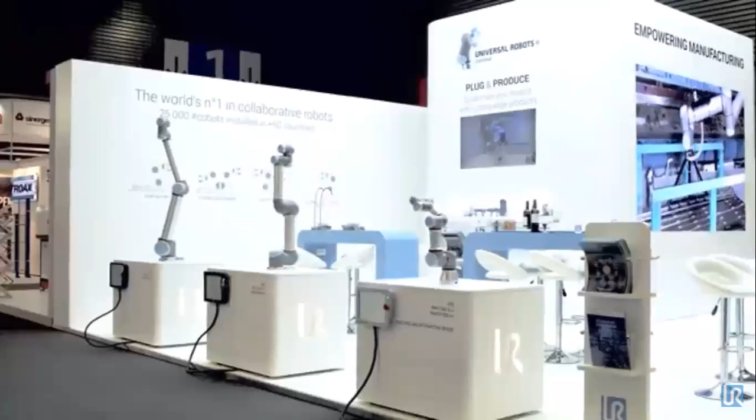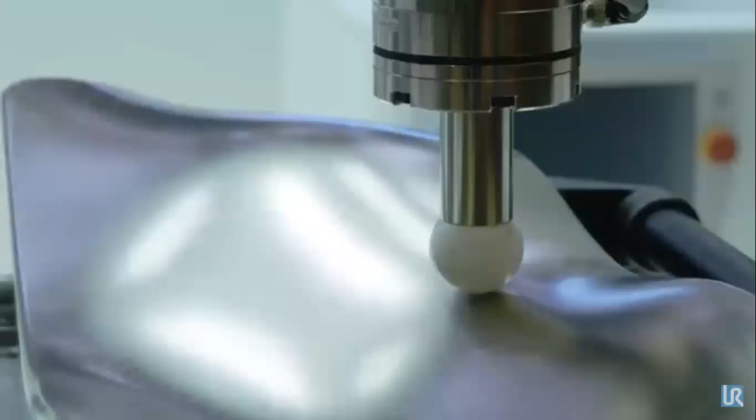In the development of robotics, there is a wide variety of interests and technologies that different companies are developing, although it is difficult to classify robots with our sequences of discoveries on which one can rely. However, one can clarify the line in which robots have a specific purpose and in this way see the progress they can carry out.

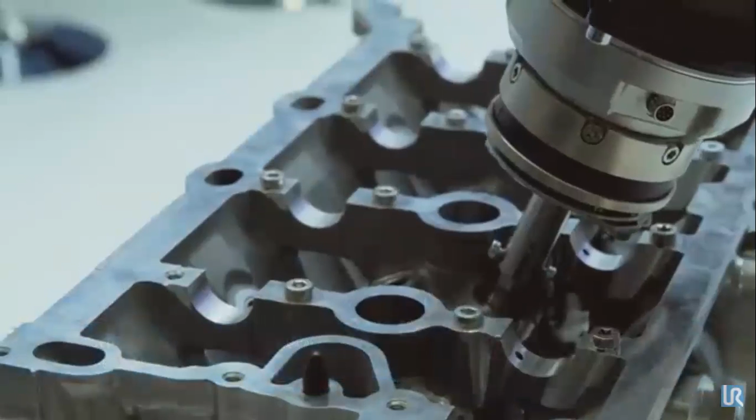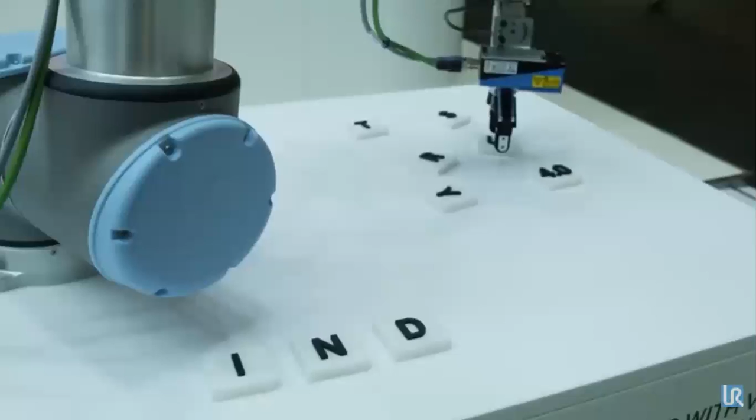In addition, one must always bear in mind that new and optimized technologies adapted to this environment emerge every day. Mobile robots are usually designed to move through environments where there are different obstacles since they are always in motion. Therefore, the environment of the robots changes in this way. They must constantly recognize the environment where they move in order to adapt adequately.

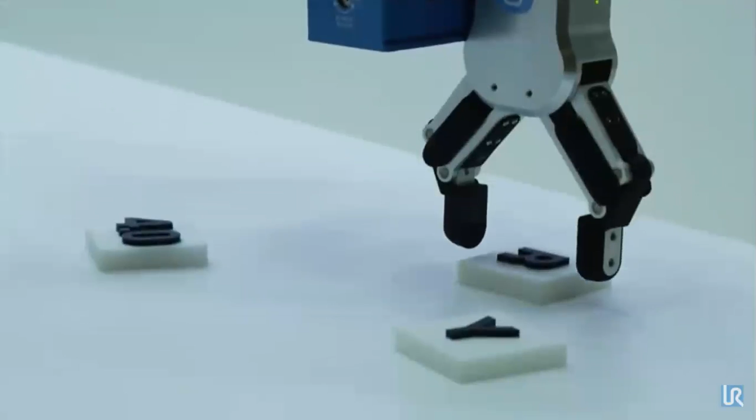To begin to delve into this beautiful field, one must bear in mind that robots have endless areas to study, but usually further investigation is cast into the kinematic model, the dynamic model, the control microcontrollers, algorithms, planning, recognition of the environment, among many others.

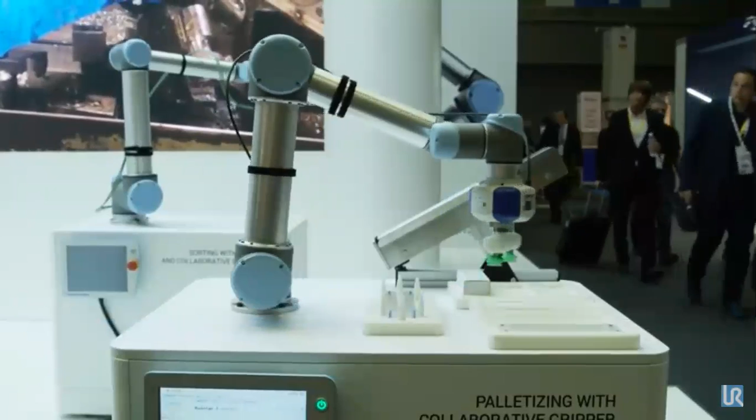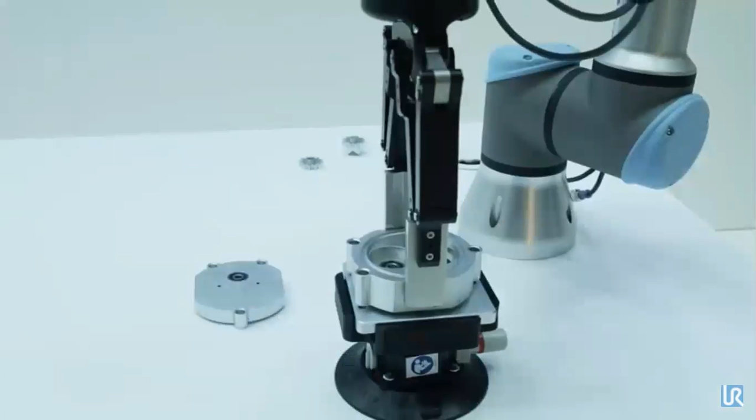Finally, the applications that we can visualize in our environment are a huge variety of fields, from mining to observation of basins or underground tunnels where access to human beings is difficult, to the least unimaginable, and in our human body, where usually there is always an exponential advance in the area of medicine, where little by little it has been needing the area of control engineering.

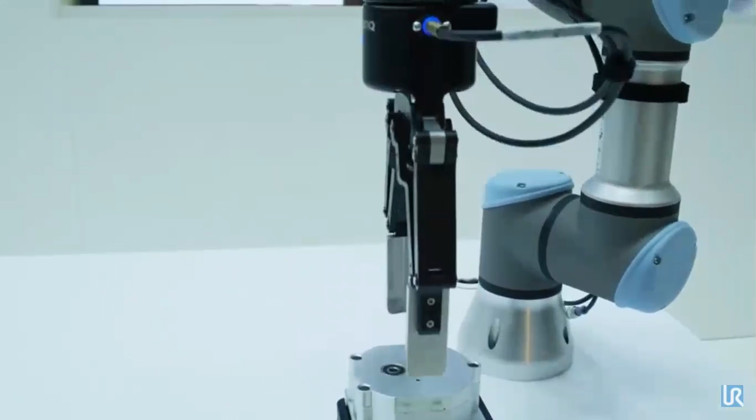Leaving this aside, there are also the famous space fields where robots are taken to explore new lands to conquer, such as in this case of Mars One. Their participation in surveillance and mapping of terrain in the military field is also very notable, as there is a good application in the maritime area among many other disciplines.

To begin the analysis, we carry out the corresponding simulation within Scilab in terms of its angular movement and its movement with respect to the axis x and y and the angle phi.

These were the variables necessary to make the block diagram work as contained, and inside of this Xcos are the block diagrams for the angular velocity motion and the motion in the axis x and y and the angle phi, where Wd is the angular velocity of the right wheel and Wl is the angular velocity of the left wheel. Movement in the x and y axis and the angle phi.

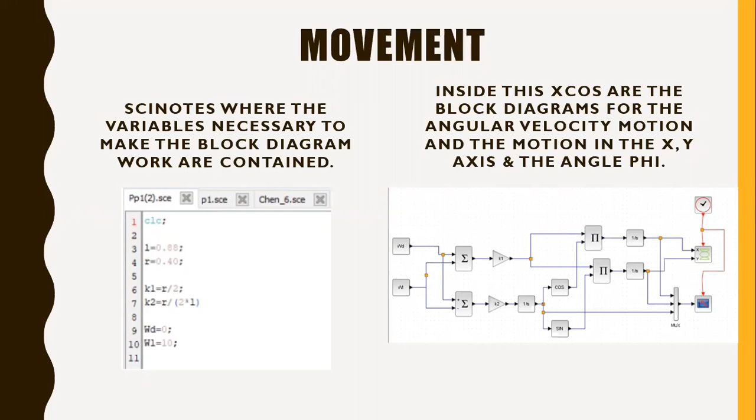In modeling of angular velocities, as we can see, the angular velocity of the left wheel is different from the angular velocity of the right wheel. Therefore, the graph looks like an ellipse. If both angular velocities were equal, the movement generated will be a straight line.

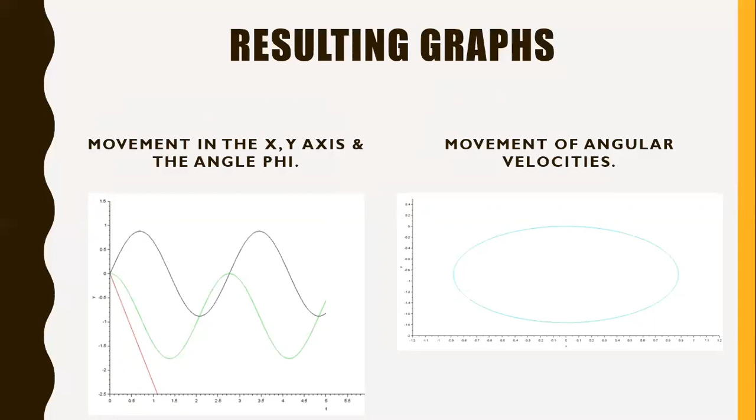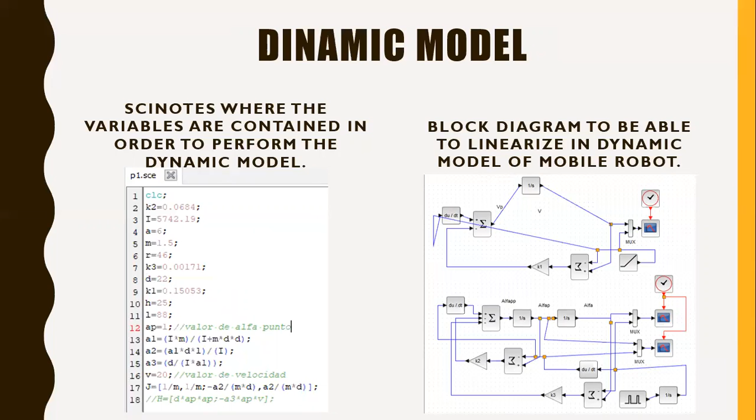For the dynamic model, you can see SciNotes where the variables are contained in order to perform the dynamic model, and the block diagram to be able to linearize the dynamic model of the mobile robot. And next are the graphs resulting from alpha point and velocity.

Next is the design in SolidWorks.

We represent the mobile robot model in a system design program that we learned to use previously, and that program is SolidWorks. Below, the process that was carried out will be displayed.

In order to simulate our dynamic system, we rely on the following models. One of the models is the mobile robot model taken from Canudas, and the other model is a mobile robot that was assembled in advance for school purposes.

In consideration of both designs, an attempt was made to do a synergy simulation in SolidWorks, and the results obtained will be shown shortly.

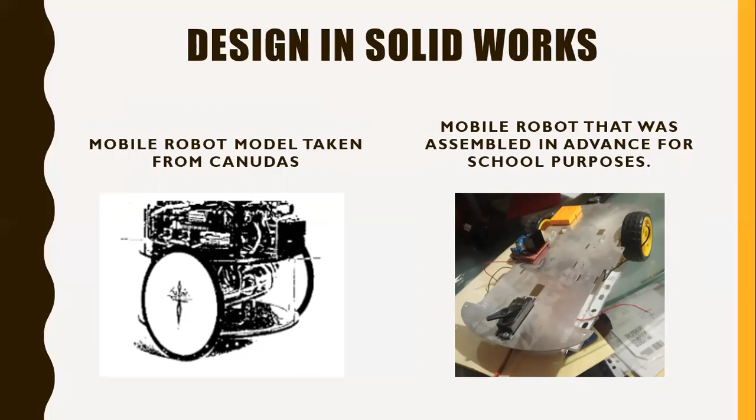You can see a rendered image of the mobile robot composed of two parallel wheels and a rear wheel.

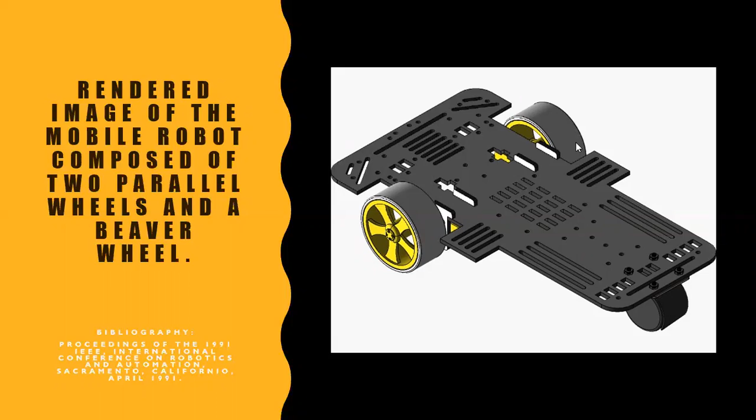That's the final result. And all the equations and functions on which we rely for the dynamic analysis of the mobile robot can be found in that document.

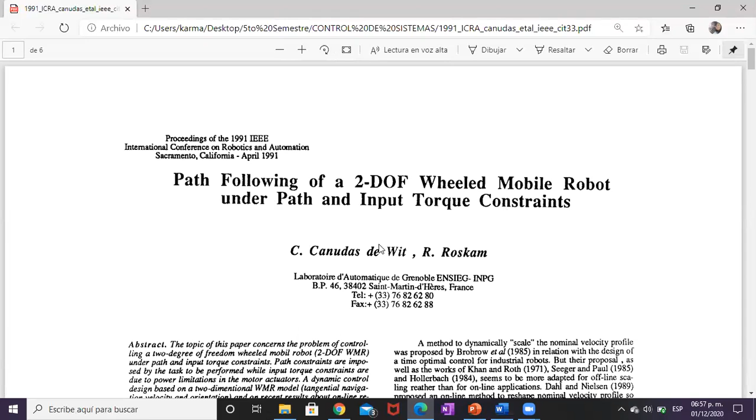That's a mobile robot presented in the 1991 IEEE International Conference on Robotics and Automation, Sacramento, California, April 1991, in Section 2, the Dynamic Model. That's a very interesting article, and this project is based on that article.

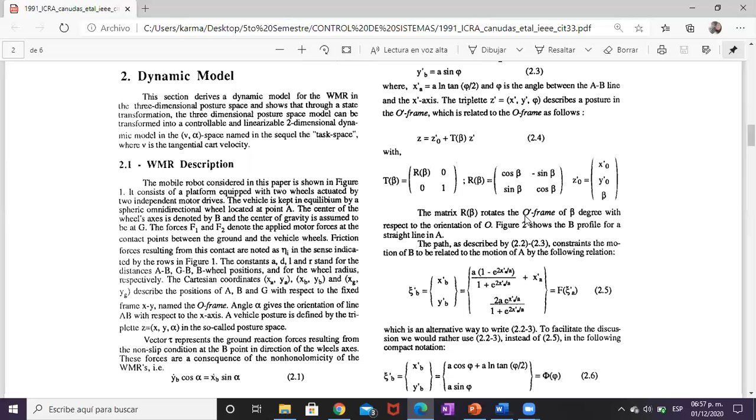Specifically, in this part of the dynamic model, the simulations and diagram blocks are obtained from that part. For example, all the variables that the team used, we obtained from this part.

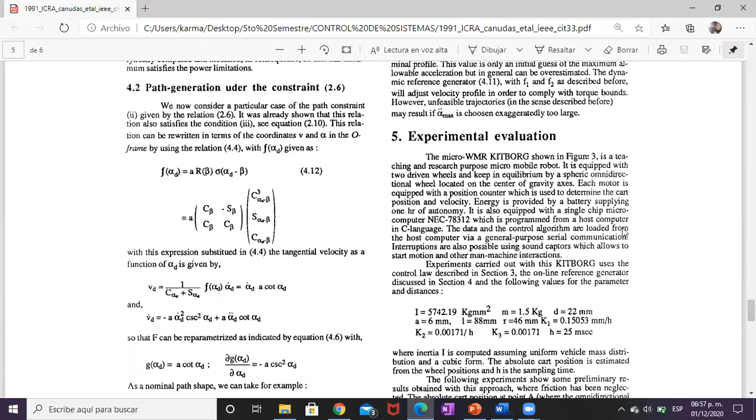The experimental evaluation, and that's all. And those are the conclusions for the simulations.